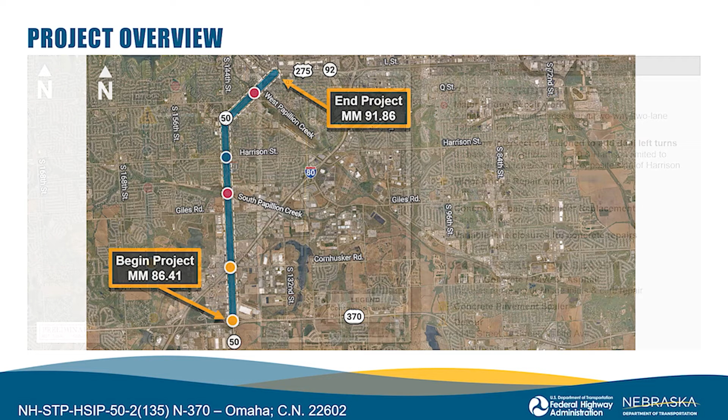The proposed improvements include concrete replacement and pavement repairs, concrete sealer, milling the existing concrete and resurfacing with asphalt, bridge repairs, removing and replacing guardrails, and construction and modification of curb ramps. In addition, dual northbound and southbound left turn lanes would be built at the intersection of N50 and Harrison Street. Construction is anticipated to occur during the 2023 and 2024 construction seasons.

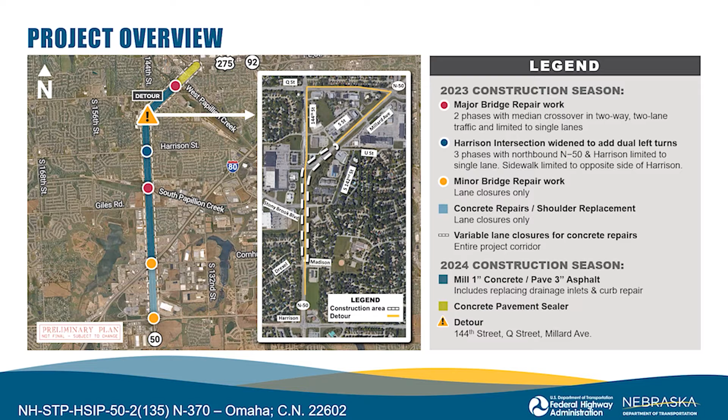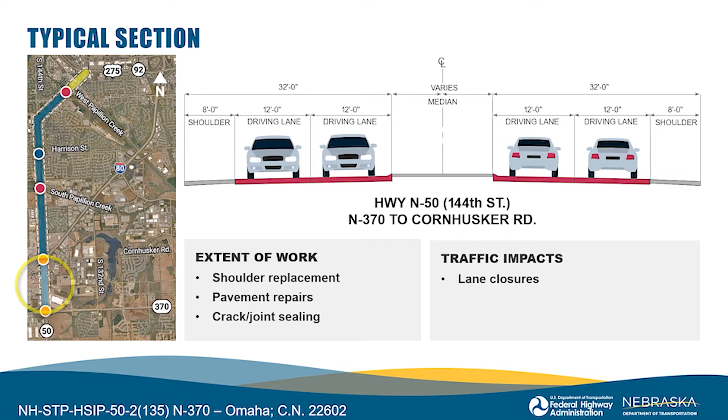The segment of Highway 50 between Highway 370 and Cornhusker Road would include pavement repairs, crack and joint sealing, application of penetrating concrete sealer, shoulder replacement, and minor bridge repairs. This work would be completed under traffic with lane closures as needed. Construction in this area of the proposed project is anticipated to occur in 2023.

The minor bridge repairs would also include the ramps at N-370 and Interstate 80 to have concrete repairs, joint and crack seal, and penetrating concrete sealer. It is anticipated this work would occur in 2023.

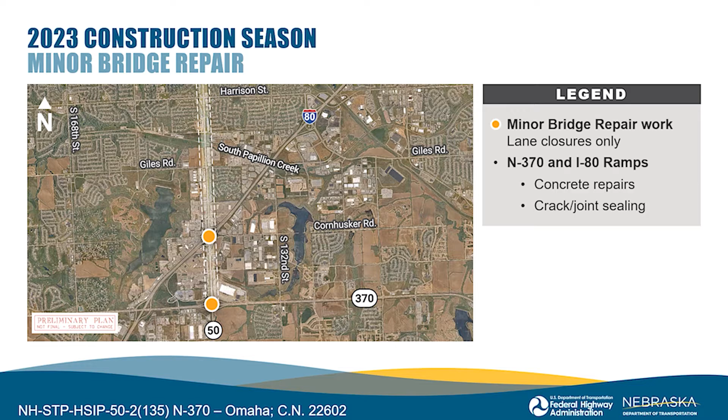The segment from Cornhusker Road to Echo Hills Drive would include milling of the existing concrete and overlaying with asphalt and inlet repairs. This work would be completed under traffic with lane closures as needed. The turn lanes depicted in the typical would only be present at the intersections. Construction in this area is anticipated to occur in 2024.

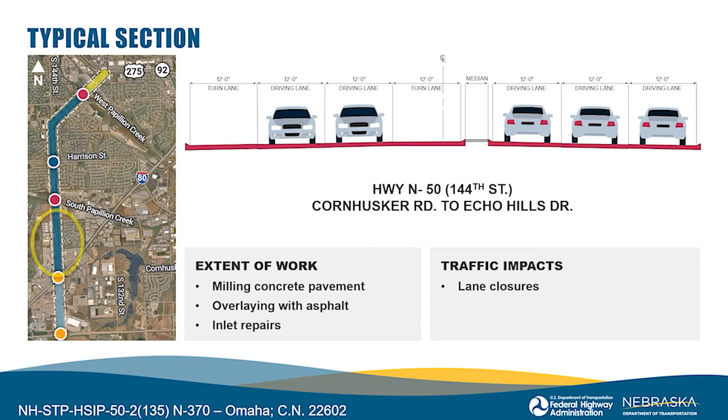Also in this area would be major repairs to the bridges over South Papio Creek and West Papio Creek. These repairs would include approach replacement, abutment repairs, deck repairs, and resurfacing. During construction, crossovers will be constructed to allow the bridges to remain open to traffic and be limited to a single lane in each direction. This construction is anticipated to be complete in 2023.

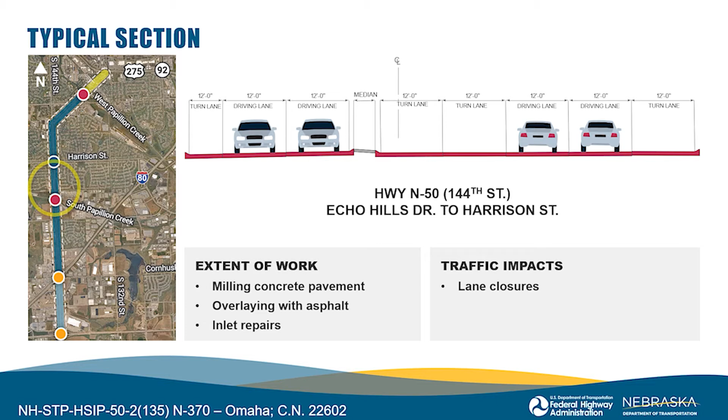The segment from Echo Hills Drive to just south of Harrison Street would include milling concrete pavement and overlaying with asphalt, and inlet repairs. This work would be completed under traffic with lane closures as needed. The turn lanes depicted in the typical would only be present at the intersections. Construction of this segment is anticipated in 2024.

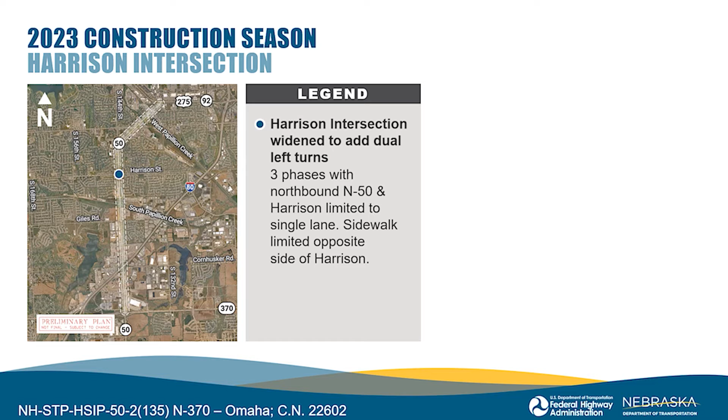The proposed project also includes reconstruction of the intersection of N50 and Harrison Street. The existing intersection includes dual left turn lanes for eastbound and westbound traffic. The reconstructed intersection would include 2 through driving lanes in each direction, 2 turn lanes, and a single right turn lane. The new lanes would be added by widening N50 along the east side of the northbound lanes, approximately 1,000 feet north and south of the intersection.

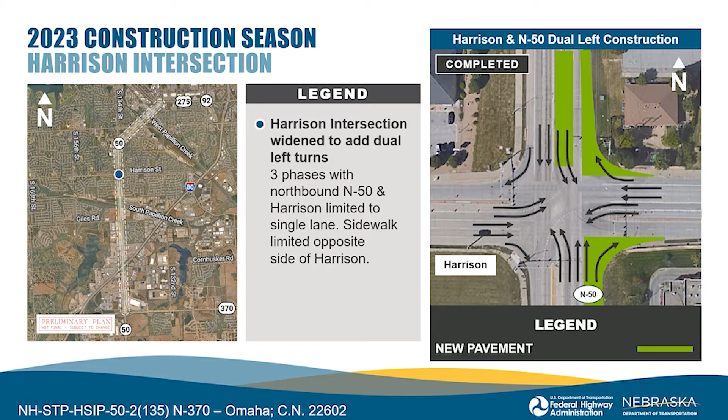This would include pavement removal and construction, culvert removal and construction, grading, sidewalk removal and construction, and traffic signal modifications. The construction of the intersection would be completed in 3 phases and occur under traffic with lane restrictions. This work is anticipated in 2023.

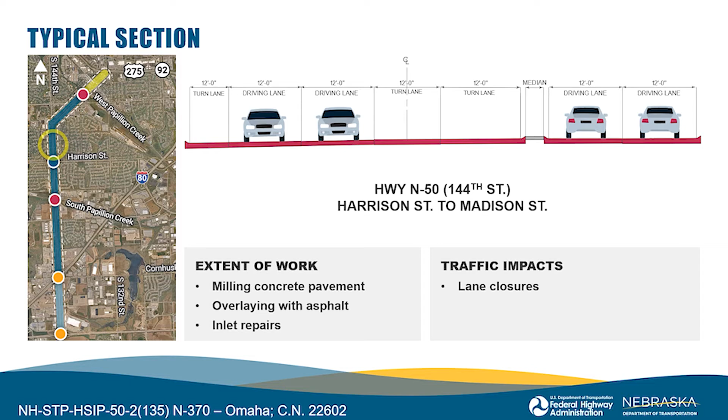Moving north, the segment from just north of Harrison Street to Madison Street would include milling the concrete and overlaying with asphalt and inlet repairs. This segment would be constructed under traffic with lane closures as necessary. The turn lanes depicted in the typical would only be present at the intersections. This work is anticipated in 2024.

Continuing north, the segment between Madison Street and U Street would include milling the concrete, pavement replacement, and inlet repairs. As shown in the existing typical, there are 2 lanes going southbound and 4 lanes going northbound until the Stony Brook Boulevard intersection. Then the roadway transitions into 2-lane traffic in each direction. This work is anticipated to occur in 2023.

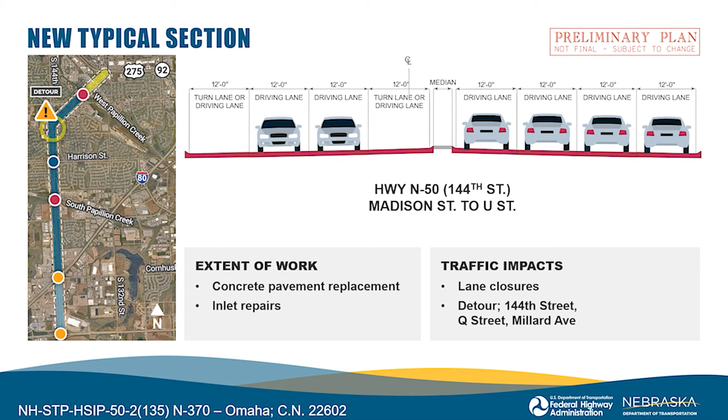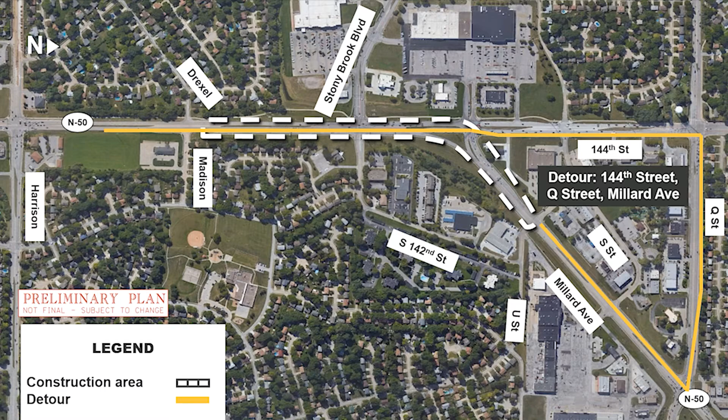As shown, with the reconstruction of N50 from Madison Street to U Street, traffic would be detoured. The detour would utilize 144th Street, Q Street, and Millard Avenue during some portion of the construction in this area.

The segment from U Street to the West Papio Creek Bridge would also include milling the concrete pavement and overlaying with asphalt and inlet repairs. This work would occur under traffic with lane closures as necessary. The turn lanes depicted in the typical would only be present at the intersections. This construction is anticipated in 2024.

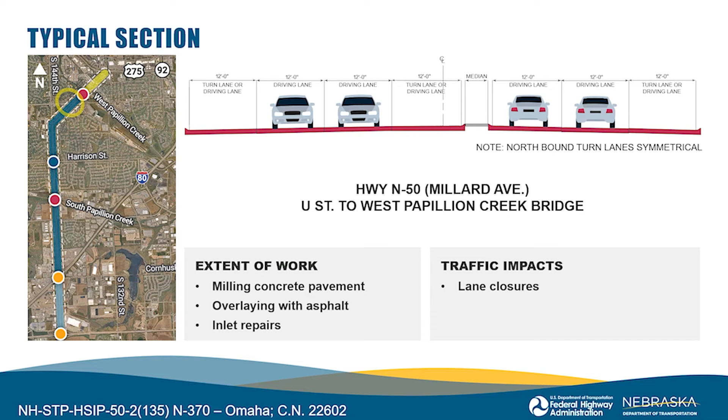Lastly, the segment between the West Papio Creek Bridge and L Street would include concrete pavement sealer. The turn lanes depicted in the typical would only be present at the intersections. Beyond the bridge, the roadway transitions into a single turn lane with no raised median. This would occur under traffic with lane closures as necessary and is anticipated in 2024.

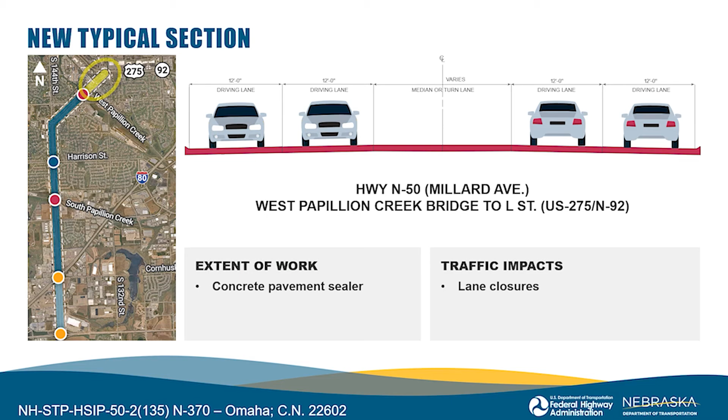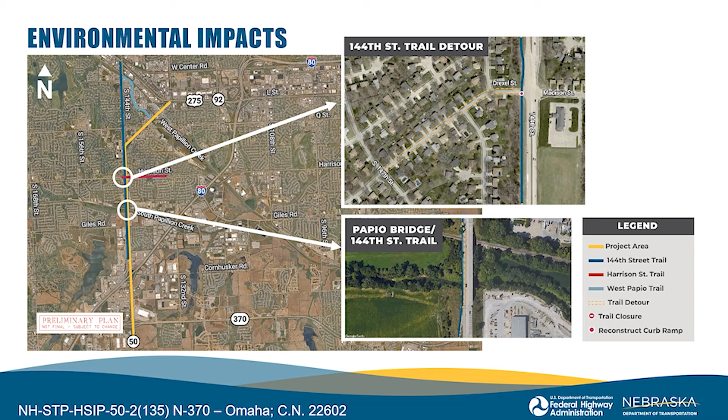The 144th Street Trail, the Harrison Street Trail, and the West Papio Trail are all within the project vicinity and impacts are anticipated. The 144th Street Trail would use Drexel Street as a detour while construction occurs in the area. Trail traffic on the bridge structure over South Papio Creek and the Burlington Northern Santa Fe Railroad tracks would be shifted to the bridge deck during sidewalk resurfacing on the structure. The Harrison Street Trail would be detoured to the south side of Harrison Street across N50 and reconnect with the trail at 144th Street.